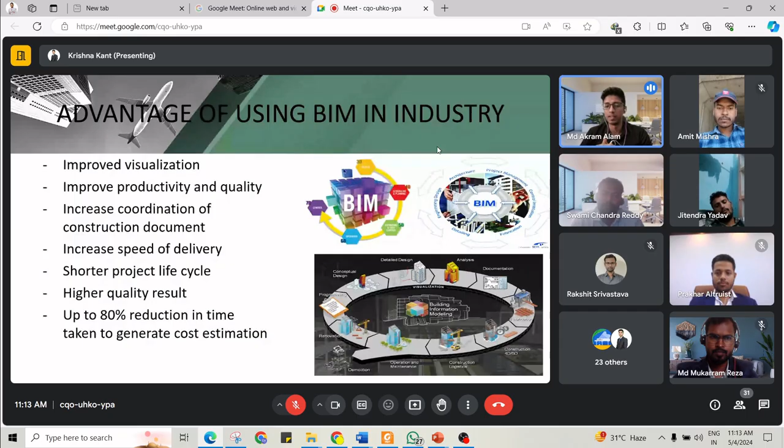With BIM we also get higher quality results - up to 80% reduction in time taken to generate cost estimation. We can save so many things. Right now the government has approved that there are some projects where we have to implement BIM. Even in the UAE, they recently launched norms where if you have land up to a certain area, you have to implement BIM. There is a huge scope in BIM now.

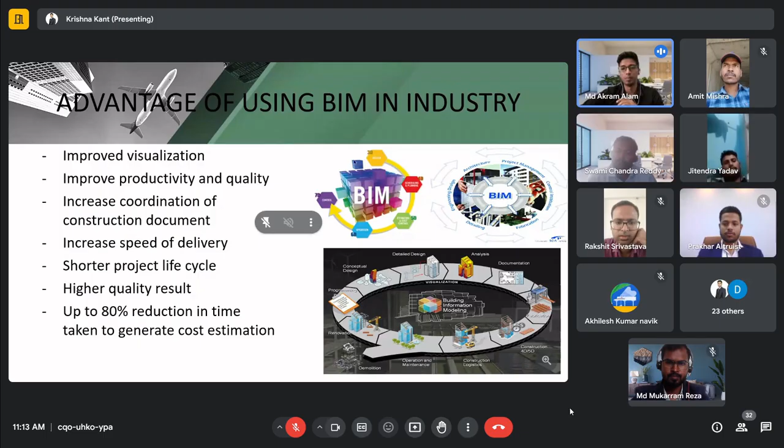Now let's see the BIM survey worldwide. Right now BIM is booming in the industry, not only in India but all over the world. You can see the graph where BIM is booming - India, Thailand, UK, Poland, Germany, France, Australia, Indonesia, UAE, Dubai, Saudi. It's all over, and we have so many regions now implementing it.

It's a good opportunity for civil and architectural engineers - they can opt for this. BIM is not only one discipline. If you think, if I learn BIM, where can I go - this question might come, right? There are so many disciplines in BIM - architecture, structures, 4D, 5D, 6D, 7D, and many more. I will show you those in detail.

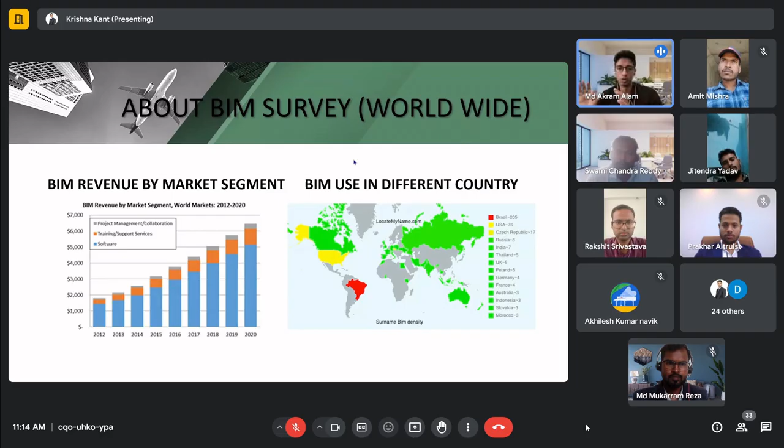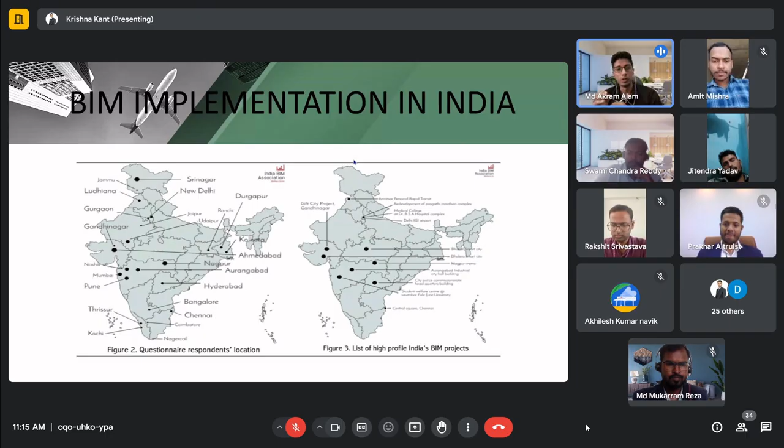Coming back to India, let's see where BIM is being implemented. Before, very few regions used BIM in India, but now you will find it everywhere - Bangalore, Chennai, Hyderabad, Ahmedabad, Kolkata, Pune, Mumbai. Everywhere you will find BIM. And if you see on LinkedIn, how many options are there for BIM opportunities - it's huge, as you can see on the map.

It's not like people who are going to learn BIM have to learn all the software. It's not like that. For each software, a different discipline is there. If people have interest in the architectural firm, they will go for BIM architecture. For them, you need to learn Revit architecture. The person who has more interest in the structural field can go for Revit structure.

Some people have interest in MEP. Some people have interest in estimation, 4D and 5D - they can go for Navisworks. Some people have more interest in the project management thing. In that case, what will you do? Then you can go for Primavera project management. There are so many software - these are the examples that we use in our industry.

Now coming back to the BIM service, as I was telling, if you do BIM, what are the options? What are the career options? Where I can go, where I can choose - in this field I have more interest, I can go there.

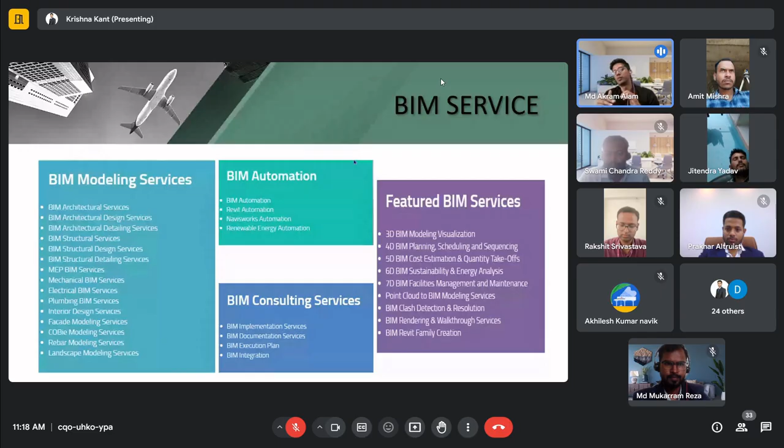With the specs you can go inside and check everything - okay, this is how my building looks. It's surprising - before construction you are seeing your dream house, this is how it looks. So now, in 2024, automation is going to hit, everyone is focusing on AI now. So BIM is not only modeling, it's getting day by day more integrated and all.

So there are some dimensions of BIM also - you can see featured BIM service. We have 3D modeling, 4D, 5D, 6D, 7D. Do you guys know what are the dimensions? You know 2D, you know 3D, but do you have any idea what is 4D, what is 5D, what is 6D, what is 7D? There are 8D also, 9D also - there are so many things.

So 3D is normal 3D, 4D is like planning, scheduling, sequencing, 5D is up to cost estimation and material takeoff, 6D will be energy analysis, 7D is facility management. Now most companies have implemented 8th dimension as well - 8D is like safety and management.

In India, people do till 6 to 7 dimensions. And if you come to international countries like UAE, Saudi, Australia, UK, US, they are using till 12 to 13 dimensions also - they are on that level of implementation. So in India also they should implement, right now they are implementing also. Before it was very less, but when you see now, it's really good.

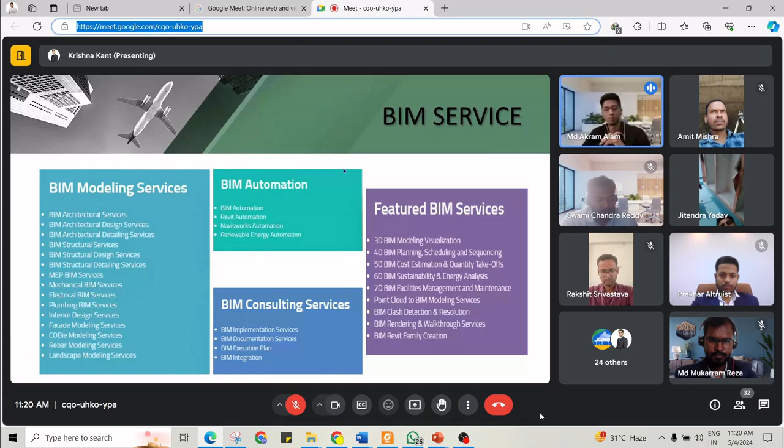Now see these are the dimensions as I told you, like 2D, 3D, 4D, 5D, 6D, 7D. These are detailed design.

Before, when there was no software, what did architects used to do? They used to do pencil sketching and all. They would show the section, they would show the elevation, this is how it looks. But right now it's totally different. It's not like doing the sketch thing anymore. If you make the 3D model, we can give the section drawing, we can give the elevation drawing, we can release the construction drawing with each and everything in detail.

So these are the dimensions where we are expert, like up to 7D we are expert. We have our team, and they are expert till 7D.

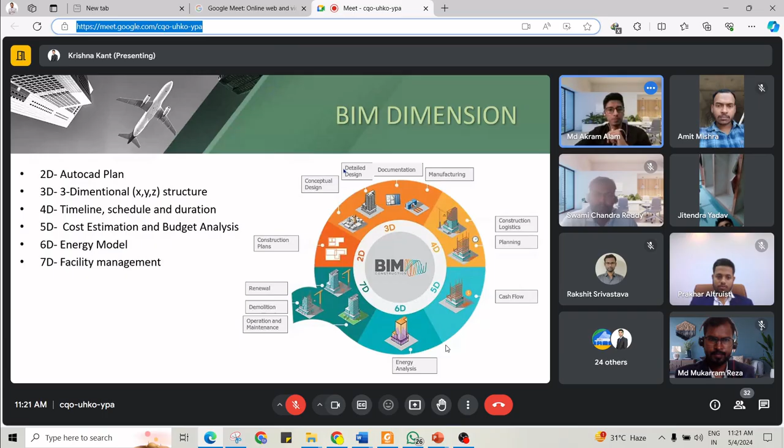Now see there are some LOD in BIM. If you guys know this, we have some codes also. Like for the structural engineer they have different codes, for BIM also there are different codes. So when you go through some code you will get the detailed design. See, there are some LOD levels.

See, LOD is level of detailing. When it comes to LOD 100, it's the starting of the project. When you start the project, what do people do? They will think, okay, in 2D they will make a rough drawing. Here I will keep one room, here I will keep one house, parking. They will just make a rough sketch, right? Just to show, we can call it the bubble diagram. We will just show that okay, this area my 2 BHK flat will be there, here my parking will be there. This small thing comes under LOD 100. It's just planning.

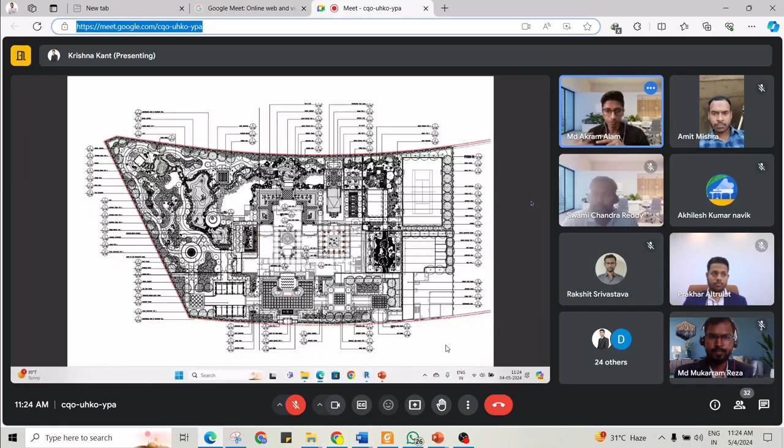Right now it will be looking like, oh, this is too heavy, I can't understand what is this, you know. This is a big project. When you do this kind of detailing, you have to deliver it to the client. Even if you work in a different company, they have their own different standards.

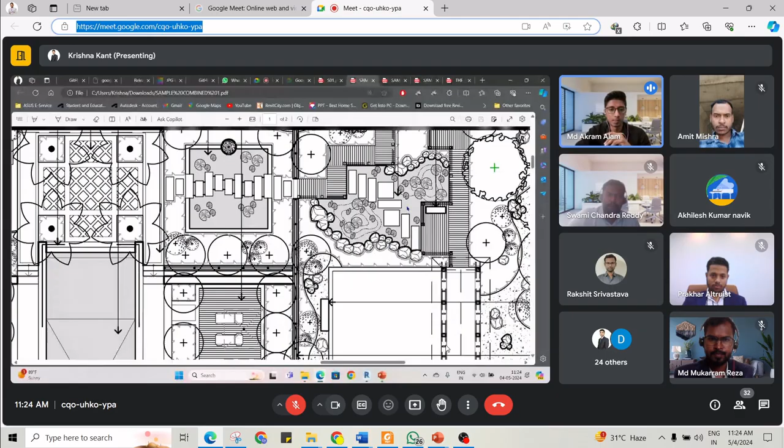Can you zoom somewhere? Now I will show you a small part. See, these are the construction drawings, like how we work. These are the detailing drawings. See all the tags, this is from the landscape. See, you can see parking, you can see trees, you can see pathway, paving, wooden deck. There are some architecture building elements, there are some tags. Can you zoom out?

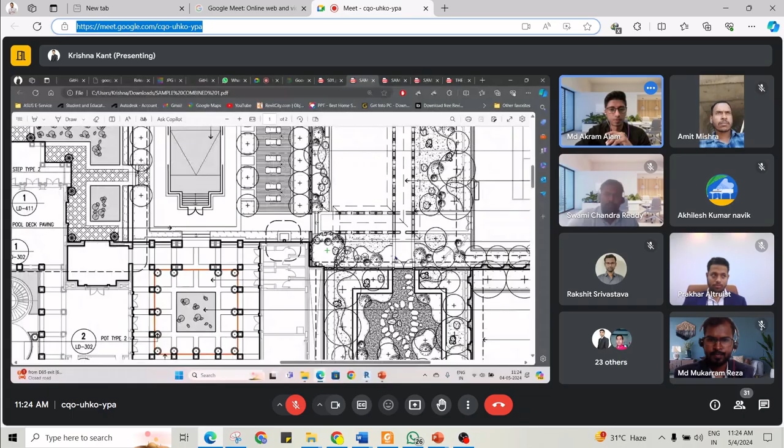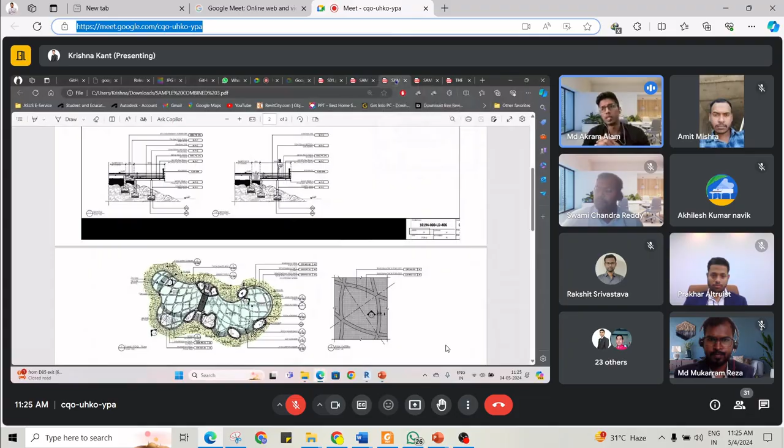See, these are the details, this is how we tag in the software. What is this pergola? 1 LD 405. We have different sheets, construction sheets. When you work, you will go to each and every company, they have their own standard of how they create sheets. These are the samples which I am showing you now, this is how we create the sheets.

See, this is the footing detail. Just hold for some time. Now see, this is also a shade structure, pool.

Now these are the sections. See, this section, it's not like we are drafting in CAD. It's not like that, this is how it looks. We make it in the 3D model, we take a section, and it will come out like this.

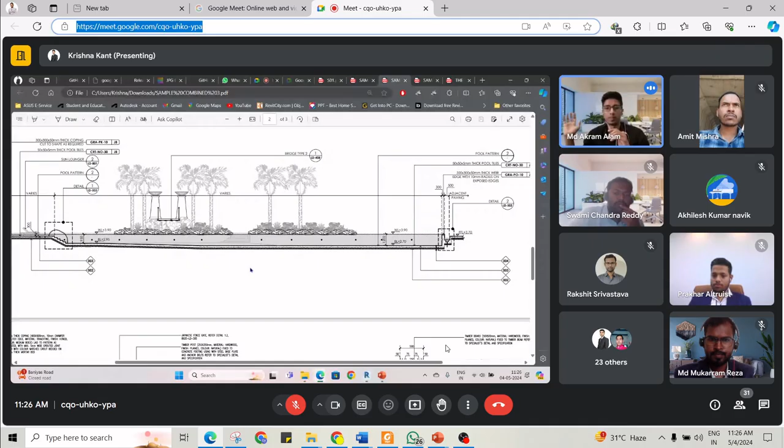We provide live sections, and we start giving the tags and everything, then we send it to the contractor. The contractor will see it, they will comment on the areas you need to change, and then it comes back to us. We change the different things, and then we proceed. Once the contractor agrees, they will start construction. So these are some samples of the sheets.

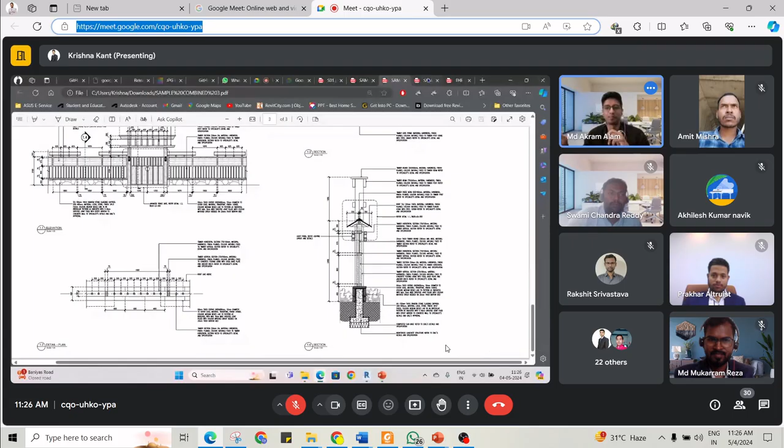Right now you people will be thinking this is too much, it's going out of my head. It's nothing like that. Once you enter into this, it's easy. Initially for 1 month, 2 month, 3 month there will be problems, but I guarantee you, for civil and architecture people, this is the area.

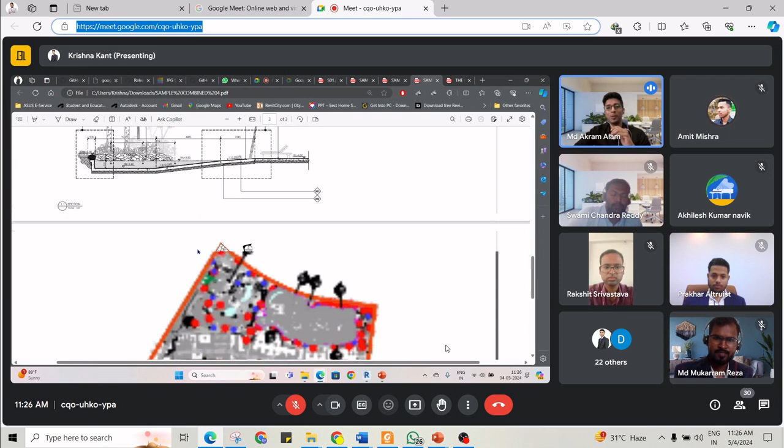As per my thinking, people need to opt for this, they have a very big scope, very big. In the structural industry, you guys can get the job easily, you have the options. I will tell you frankly, I have trained more than 2 to 300 students over the past 3 years.

I am a trainer as well, I train people not only from India but from other countries also. And they have not only one job, two jobs, they have 2 to 3 options. Most of the people, 60%, have 3 to 4 options to join companies. In BIM, you can't imagine how many options are there.

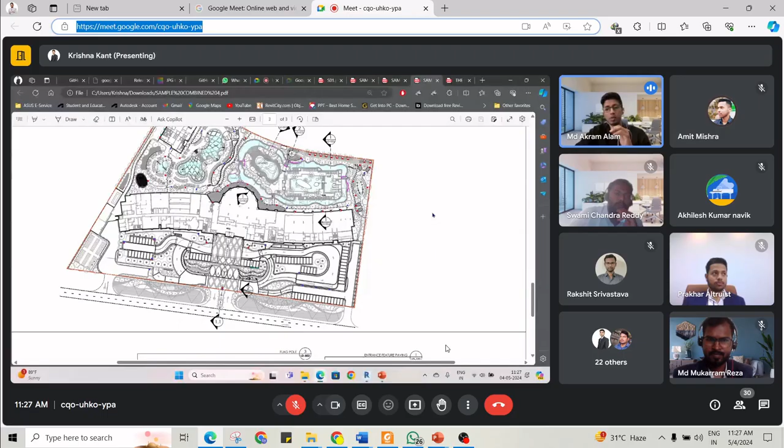You guys can go to LinkedIn and search, because this is the time. I guess third and fourth year students are here. This is the time you have to choose one discipline, and you should be clear on that, you should have interest also. It's not like, okay, this is good, I can join. Joining is fine, but you have to show the interest as well, and do the things properly.

This is a huge scope, because in India, what I can see for engineers, they don't know where to go, right? Some people are going into IT, some people are going elsewhere. Now we are here to tell you the true picture about BIM, about structure, for architecture engineers, for diploma holders, for structural engineers, where we can go. So I hope you understood this.

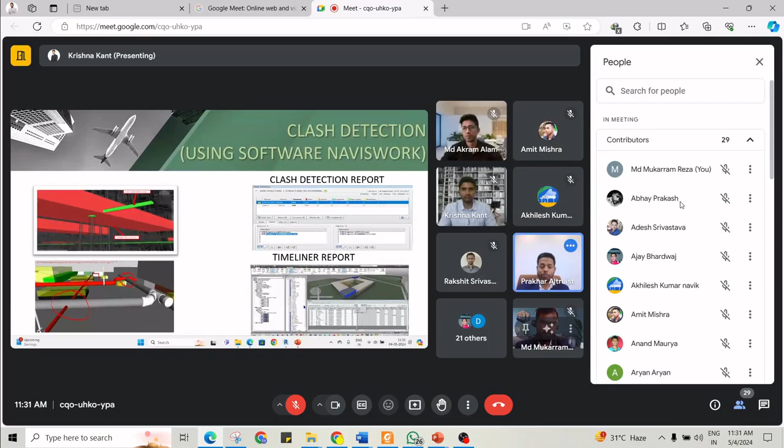So clash, what is clash we are getting in civil? Suppose a pipe or a duct is going through the column or through the beam, so it will definitely impact the valuation of the cost of the building. That is the reason we do this clash detection before implementing the project on site.

So this is the total visualization process. When we are going to implement the project on site, before that we have to do this type of process, and for this we have a lot of documentation process also.

I am the expertise. I was the BIM coordinator of an MNC company, and I did a lot of projects. I created a lot of documentation for this inside BIM with the help of the ISO 19650 codebook and BS 1192. There are a lot of codebooks also, but you don't get this codebook knowledge inside the CAD industry or inside the training industry.

Actually, we are having our own office, we are doing our own projects. That is the reason what we are going to train you is totally based on job training. If you guys get training from us, you will have better knowledge of what is going on in the industry.

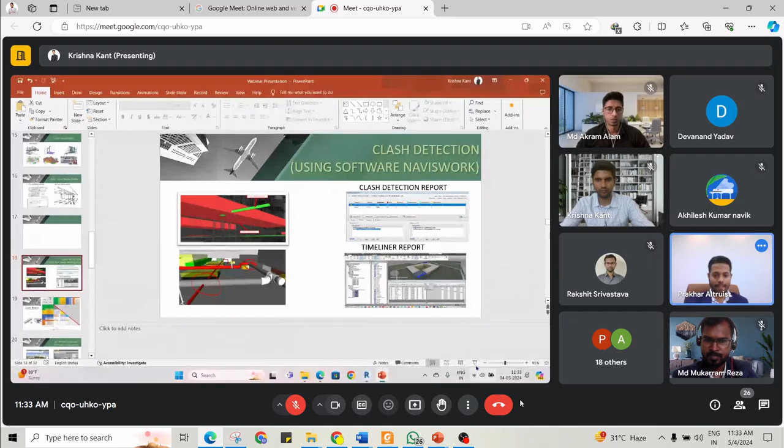One more thing I want to let you know, these are all the processes for the BIM coordinator. Do you know the salary expectation of a BIM coordinator in India only? The minimum salary in India for a BIM coordinator starts from 8 LPA. If you are talking about the UAE where we are seated, over here the salary of a BIM coordinator starts from 24 LPA to 30 LPA. It is the minimum salary that a BIM coordinator is asking.

One more thing I want to let you know, within 3 years I became a BIM coordinator. Then within 5 years I started my own firm in the UAE, and we have already registered our own firm in India, that is Gyrfalcon Design and Build Private Limited, and in UAE, Gyrfalcon Design and Engineering Services LLC.

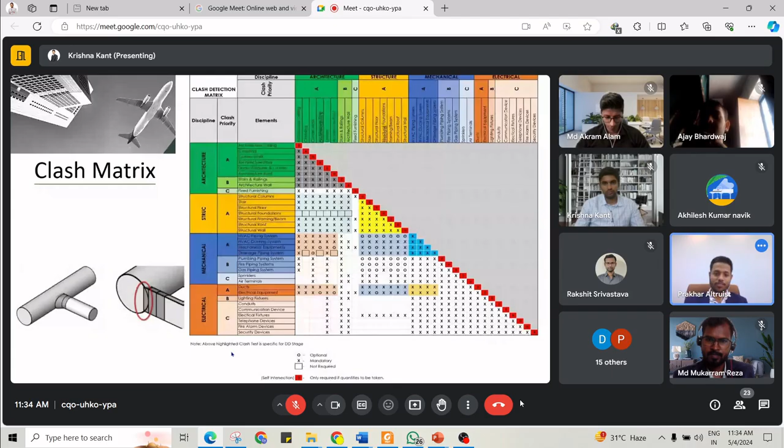Please move on. So you can see here this is the timeline schedule duration. What is this timeline? When we are going to construct any model on site, a lot of huge material, you can see, gets kept anywhere.

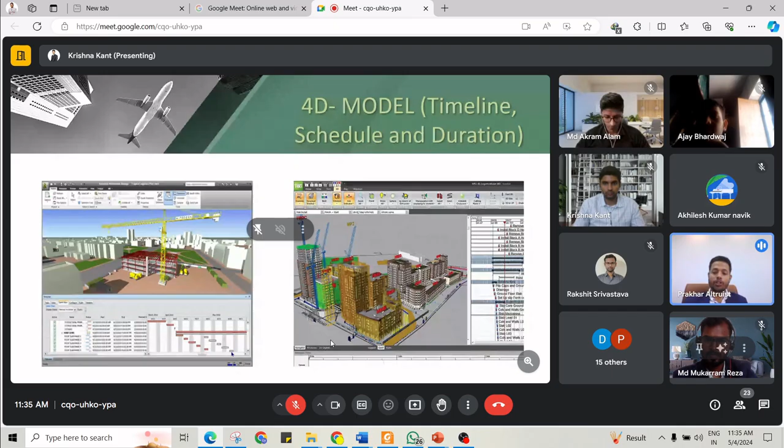Because of that, you lose a lot of material quantity. That is the reason we do this simulation process, so we can get a proper idea of where which material has to be put, so it will not impact other equipment or the flow of the construction.

Do you know how you will save the cost of the building while doing budget analysis? In the previous era, if you were going to do the quantity takeoff, you only had CAD drawings, and with that you had to do the calculation for each and everything. Then you would get only an approximate quantity. But now in the automation industry, in the BIM industry, building information modeling industry, you have the power to make a model and take the quantity takeoff within a minute, and analyze the proper cost of each and every instance. Like this, you can save 80% of the cost of construction on site.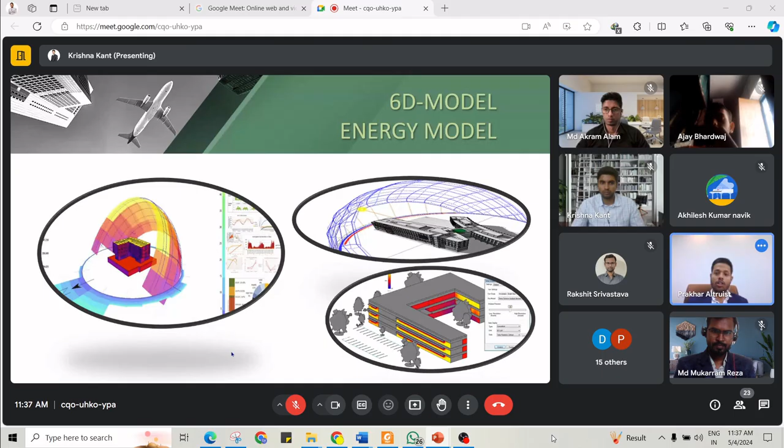We are the person who are going to train you what is energy analysis and what software you are going to use in the energy analysis. We are not just going to teach you these are the tools, you have to create the wall, no, we are properly involved people who do this type of analysis in the industry, and who are saving a lot of money for the builders and the contractors as well.

Now, 7D facility management. What is facility management? This is, suppose you have already created a building, and now you don't know the durability of, suppose, a door. Suppose the door is an oak wood door, I'm taking this just as an example. Its duration is 10 years.

So if you have this facility management involved in your model, and you have the BIM model of your building, automatically it will blink in front of you that you have to change this door within this duration of years, this time duration. Like that, you can save your cost, you can save your money, you can save the builders' and contractors' money, and you also become part of the BIM industry.

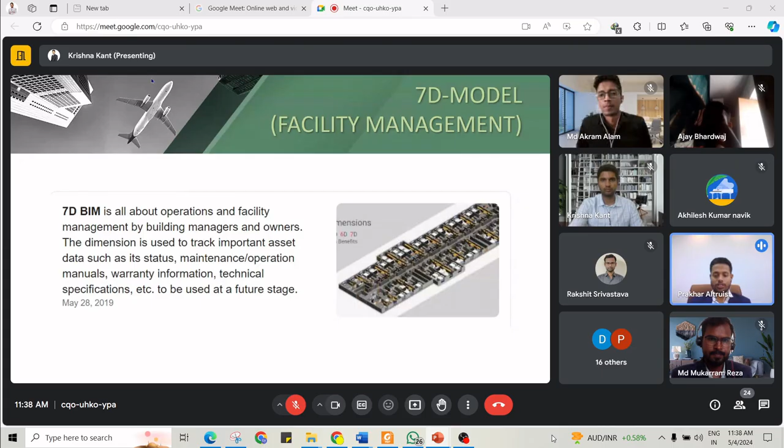And with the help of this, nowadays contractors and builders are doing IRR ratio also. IRR means internal rate of return ratio. So construction companies and builders are investing the money, and they are asking for the returns, how much they are getting. So that is all from my side.

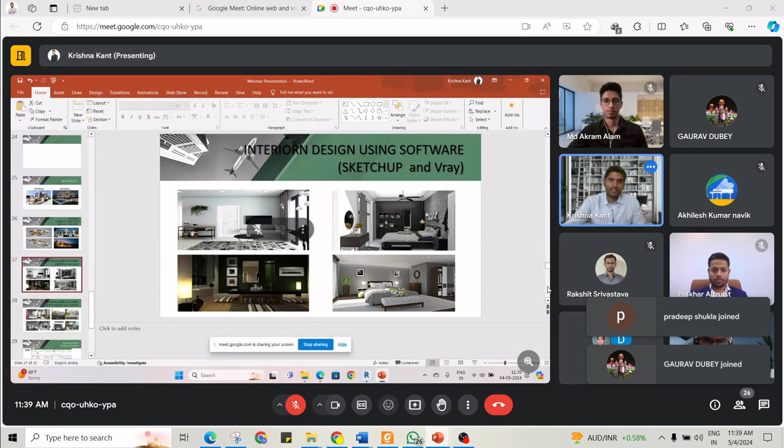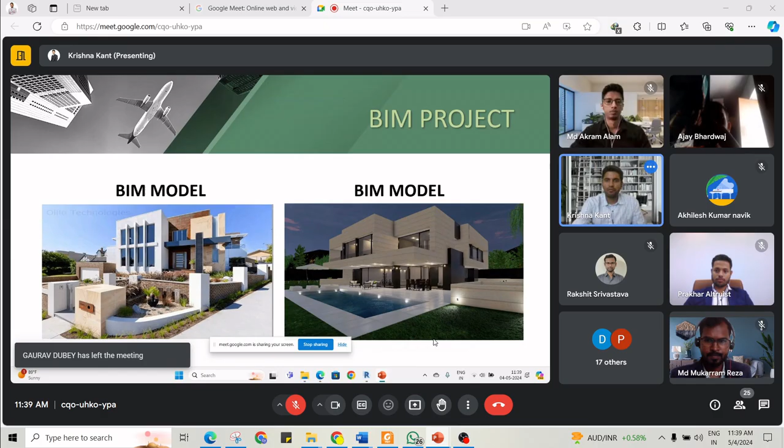So I will show you some projects which we have already done before. These are some projects which have a very good elevation. Even the BIM model we have created for this kind of projects. So you can see the projects have a very good aesthetic view which we have to show to our client. For these kind of projects we are dealing with, we have to create the isometric view, and sometimes show the client their spaces, how we can utilize the spaces quite well.

So for that we have to use different software to present their houses and flats, and sometimes duplexes, so many villas and all. We have to show their aesthetic view also.

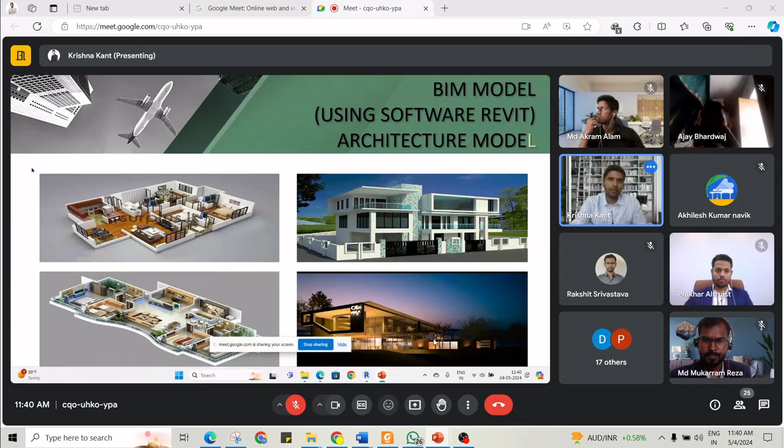These are certain interiors also we have to draw inside our project. So you can see how exactly we can show the bedroom, living room, and sometimes the kitchen and whatever the utility area, washroom and all. We have to show the interior for that.

And the software which we are using for this type of rendering and all, basically it's a combination of software such as SketchUp to V-Ray, SketchUp to Lumion, Revit to Lumion, and there are so many different software as well, like D5 and so many others. So those software we are going to train you, and we will let you know exactly how beautiful render quality it will take out from our model.

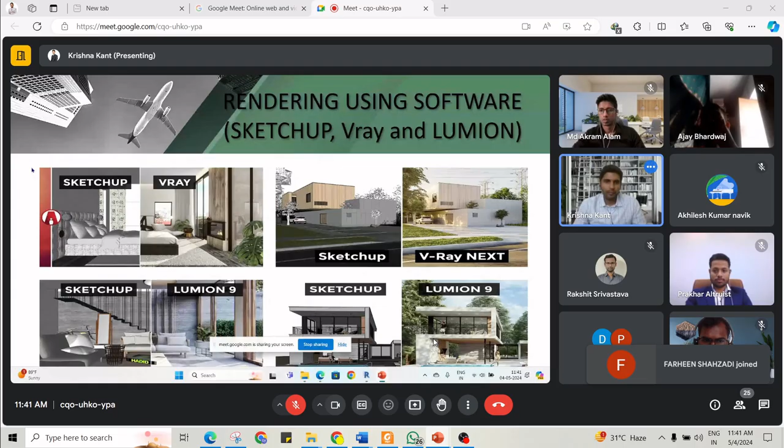Now coming to the project management part, obviously you all are aware of management. Nowadays, without a manager, we can't handle a single small project. Even a food area requires a manager. People are doing MBA and all, and after that also they are searching for jobs. But in this BIM field, we have to do the management for the building, like how exactly we are processing the building, scheduling the exact time duration and all.

So for that there is so many different software, obviously Navisworks and the different Synchro part, which Prakhar has already shown in the 4D and 5D simulation. 4D is basically the timeline, and 5D is the cost model.

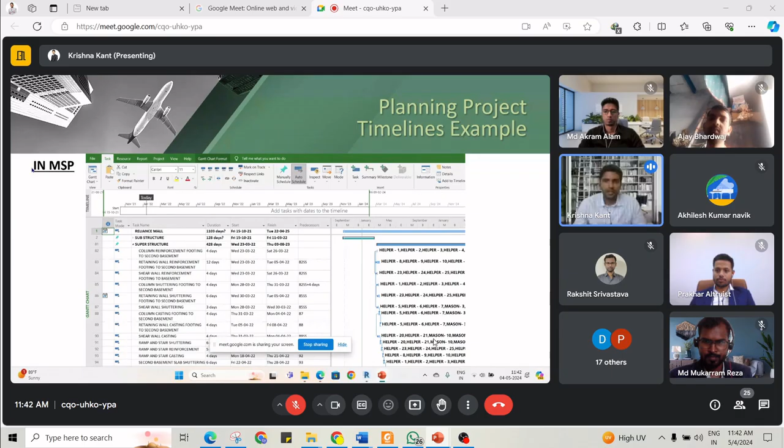Apart from this, there is the software called MSP, Microsoft Project. In this, we have to deal with the timeline and the planning part.

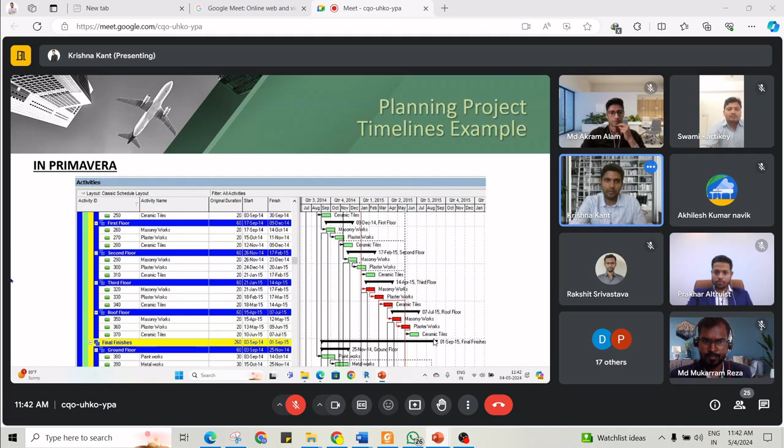There is another software similar to this, Primavera, which is nowadays used all over the world. It's a quite good software which deals with so many different charts and different information inside the project, and it will carry out all the project information at a time. So it's a very good software, Primavera. We can teach you this type of software. It's a very handy software, and nowadays it's used by almost every company.

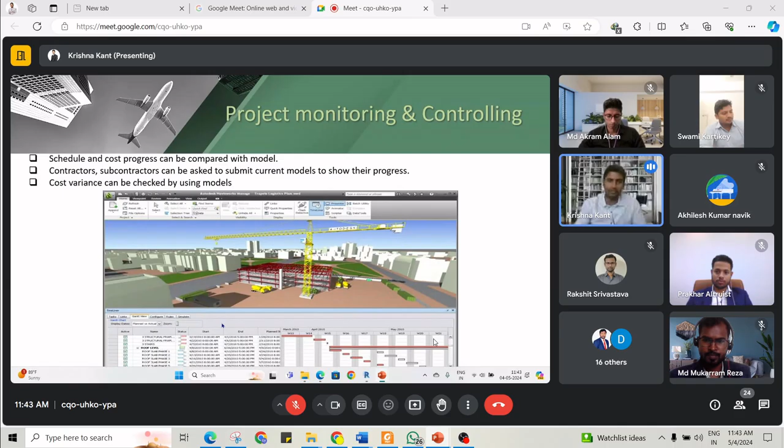So the Synchro part is also there. Synchro is a very good software. From this software we can not only create those kinds of schedules which were already shown in MSP and Primavera, but we can also show the 3D simulation video, which is very effective to visualize the thing, like how exactly the machines and machineries, the levers and all, how exactly we are managing. We can show the levers, like how exactly we are dealing with which type of lever machines, and we have to calculate as well, like what are the costs. From this software we can analyze the cost as well. So basically, these are the project management software.

I will show you certain interior renders and all, so you can think about how exactly we are visualizing our projects.

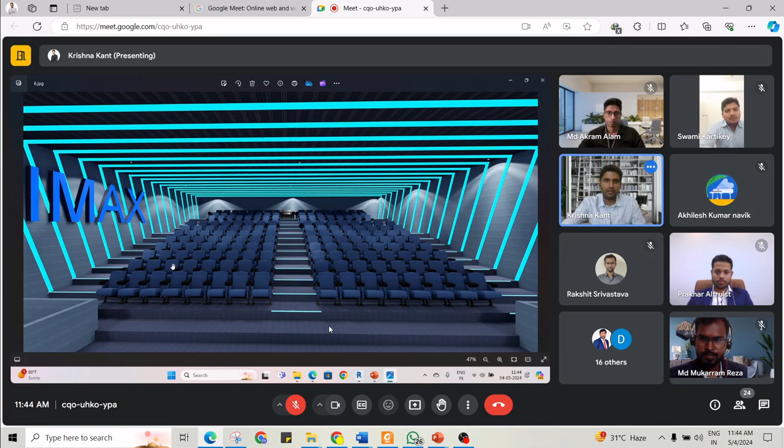You can see this is one of the theater render projects. Inside this one project, we have done work for Reliance Industries. You all know how big their projects are. So these are certain theaters, and you can see the video visualization also. You all went to the theater, right? So you can see how exactly we are presenting the theaters and all to our client. Quite interesting.

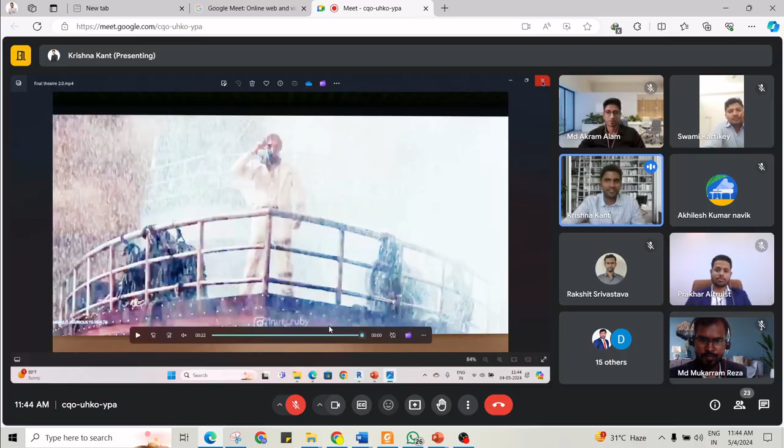I will show you another video. So you can see how we are presenting to our client. Obviously, the client will be so much happy after seeing this kind of animation and all.

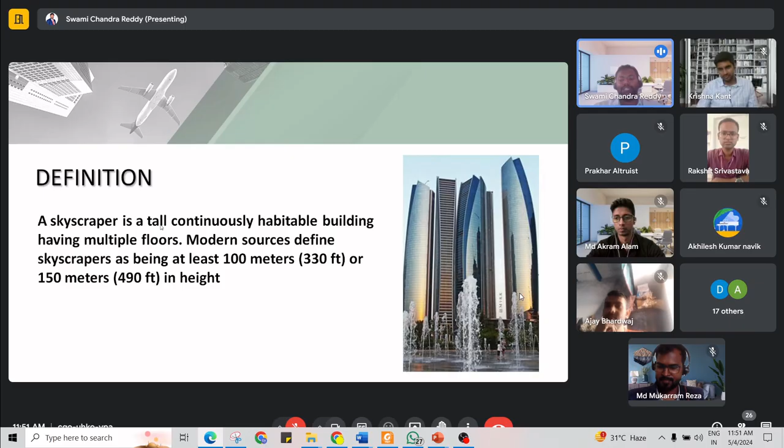I'm asking in terms of, see, there is a parameter called ductility. You might have heard about ductility. You might have seen the Bahubali movie where Prabhas enters Rajkota with a coconut tree, bending it like a rope, and throws it. So in the same scenario, the coconut tree has so much ductility that even when a lot of forces come and hit it, it sustains. It has lots of ductility which resists whatever vibrations there are. Similarly, high-rise buildings also require this ductility parameter, even stability parameters. So all these things we need to take care of while designing.

Okay, let's move to the next part. Why are high-rise buildings in demand in the market? The first thing is because of the space problem. You have some 100 square feet area, so you can construct 10 floors in that building and use it for 10 people instead of one person staying there, similar to that example. And it might be the business plans or economical growth. If there is no high rise, the city will look so dull. So for the growth of cities, technological advancement, aesthetic views, concept of city skylines, and human expressions, an engineer wants to design buildings at this level to get fame or whatever it might be. So these are the general demands for high-rise buildings.

So once you go to the distribution of high-rise buildings, where actually most of the high-rise buildings are located, you can see the UAE countries where you have the top largest buildings like Burj Khalifa, Nakheel Tower, Anara Towers, Dubai Towers, and if you go to Moscow, Russia Tower is there.

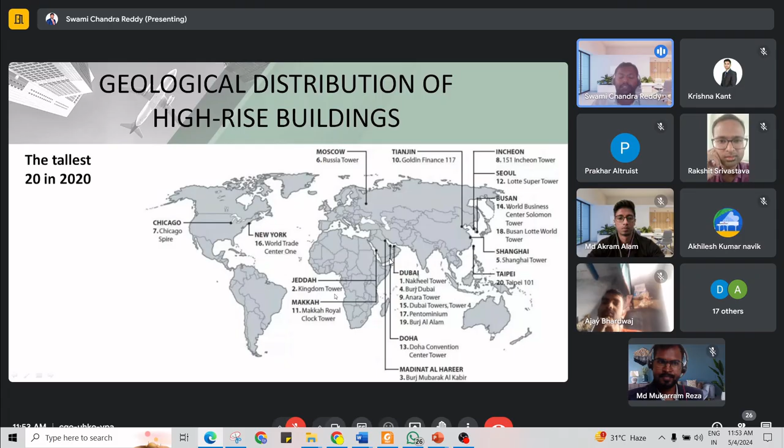Like now currently there is one more tower in Jeddah, this Kingdom Tower, which is going to be a very largest tower. So let's go to that schematic scheme.

So it's very prestigious for our engineers. How to design those things? What is the secret of balancing those buildings for all types of resistant forces? You know what huge forces will be there as dead load? How to construct the foundation for this particular weight? How to resist in this building? Okay, so all these secrets are there in the back end. We will discuss further.

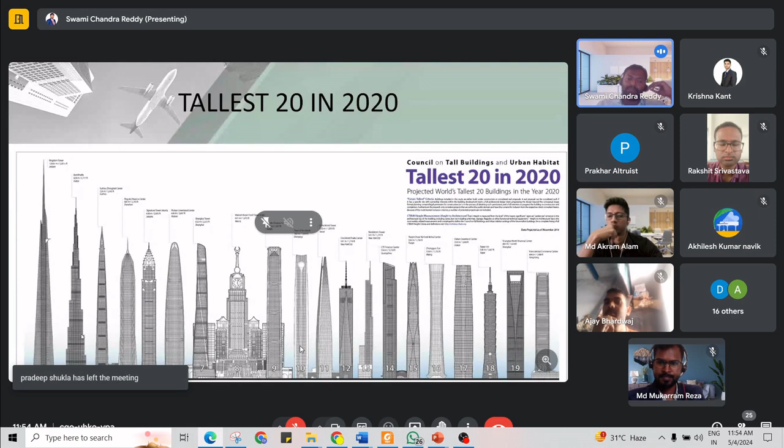So you can see the flow chart, how the buildings all scaled up to the surface in the year 2020, and now whatever is constructed, right now it's Burj Khalifa, and the ongoing project is Kingdom Tower. It's happening right now. But when you evolve the structural systems, let's say you have a 100-floor building, what type of framing structure will you use, what type of construction sequence will you adopt, either RCC or steel, how will you decide, how will you come up with these things.

So here these are the general thumb rules we are discussing. Let's say if it is a 40-story building, generally we can go with a rigid frame system. There is no hard and fast rule to create complexity which will increase the contractor or builder cost. So not required, whichever is feasible we will choose it.

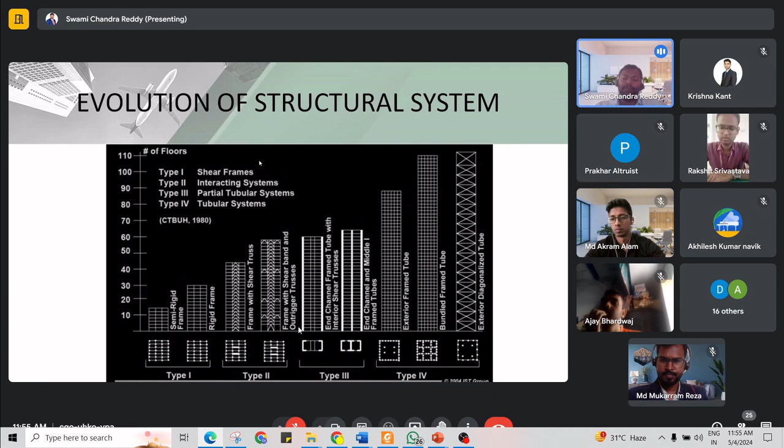So let's say we are going to build a 100-story building, there you will choose exterior frame tubes, like you will choose adaptive columns or positions for the framing structure. If required, you will take bracing systems to resist all the shear forces and bending moments. So this is a general image of how you will adapt the type of framing.

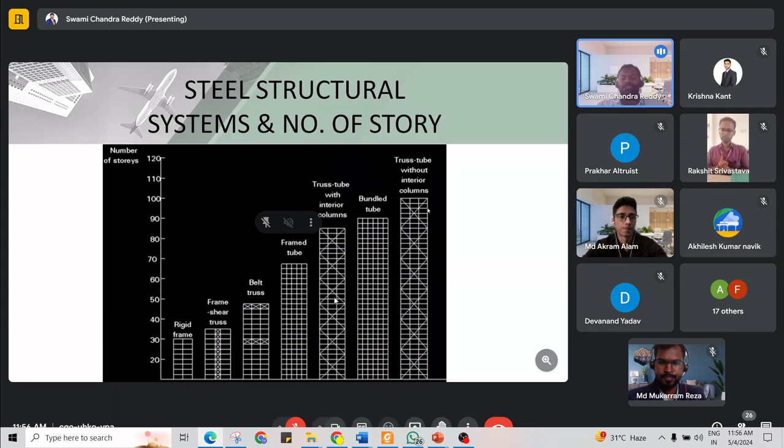So this is the steel structure information on how to adapt such things. Mostly high-rise buildings will not preferably be taken as RCC, like steel, because there are advantages as well as disadvantages for steel. When coming to the advantages, it's a very easy, quick way of construction, but it's a costlier process as well. RCC is much cheaper than steel. But if you still want to build 100 stories, you can go with the bracing systems of steel projects. So this is a general schematic sketch of how you will choose the parameter.

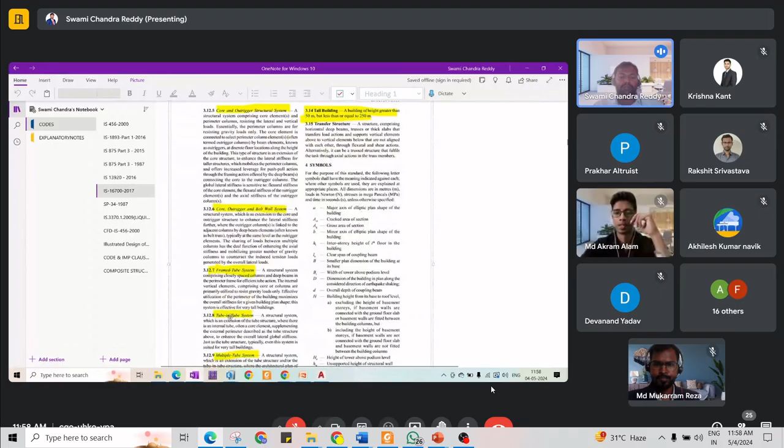So you can see the types of systems over here: multi structural wall system, moment framing systems, flat slab systems, outrigger systems, frame tube system, tube in tube system, multiple tube systems. All this, what we are representing in terms of images, is already generated by the code, which is IS 16700. You should be aware of this code if you are going to design a high-rise building.

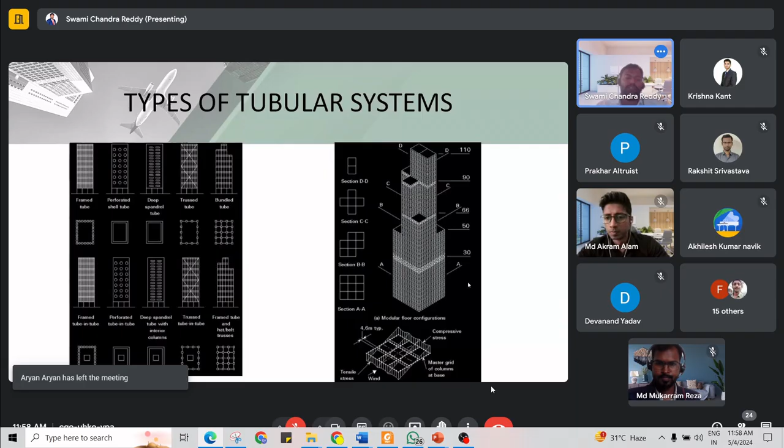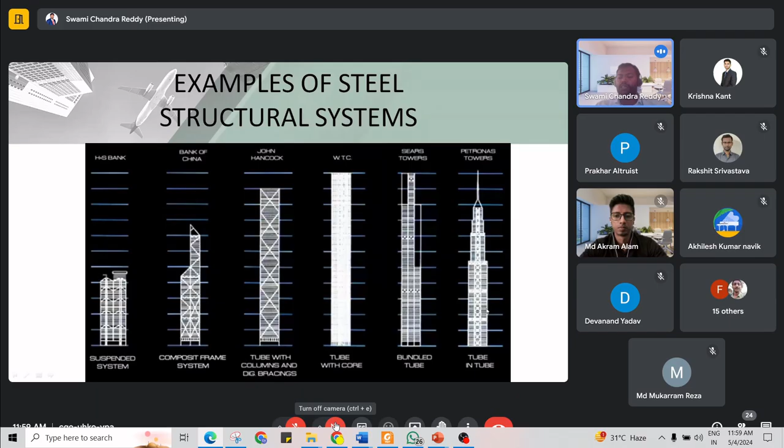Then some examples of steel structures, how the bracings are taken care of. You can see this building completely going with a central core, with the periphery as columns, and in between as bracing elements as deep spandrels.

Okay, next let's go to the shear resisting system. Let's say it's a 2D frame where in college we'll solve through Kani's method or moment distribution method to solve all these forces. But when it comes to reality, there is no 2D. So be aware while you learn the concept, and apply the concept into converting your designs. Whatever we learn in our B.Tech days is going to be only for the basic purpose.

But if you want to enter the market or society, you require practical experience using software, because you can solve up to a maximum 3 by 3 or 4 by 4 matrix by hand. But if you want to design such a big building, the software itself takes 1 hour to analyze the structure, which means thousands of matrices will be developed inside the software to do the calculations. The report generated by ETABS will be thousands of pages, which a man cannot do by hand calculation.

If it is a G+1 building with a gravity system, anyone can solve it sitting for 1 or 2 days and close it out. But when it comes to high rise buildings, even professors or whoever it is, I'm generally specifying, no one can solve a high rise building through manual calculations and state that this building is earthquake resistant proof without software help.

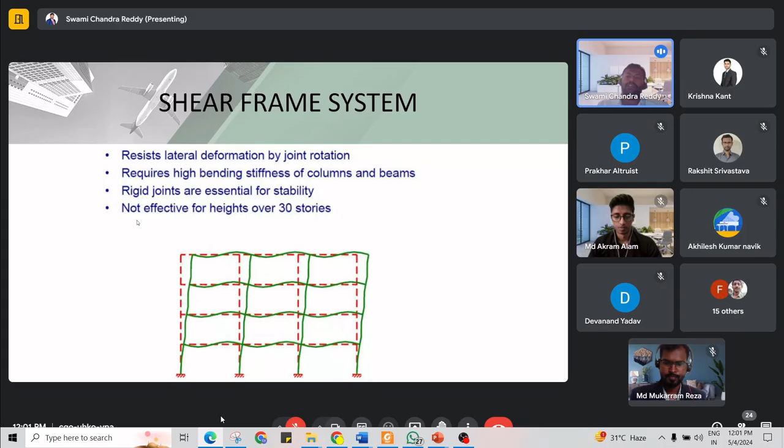Let's say some unknown guy sits in front of the software and clicks something, then knowingly or unknowingly the force distribution or load path is going to be changed, which is not exactly right compared to how the manual thing happens. So we should be aware of how the loads are happening or transferring in the building design, as well as checking with the software design. I prefer both cases.

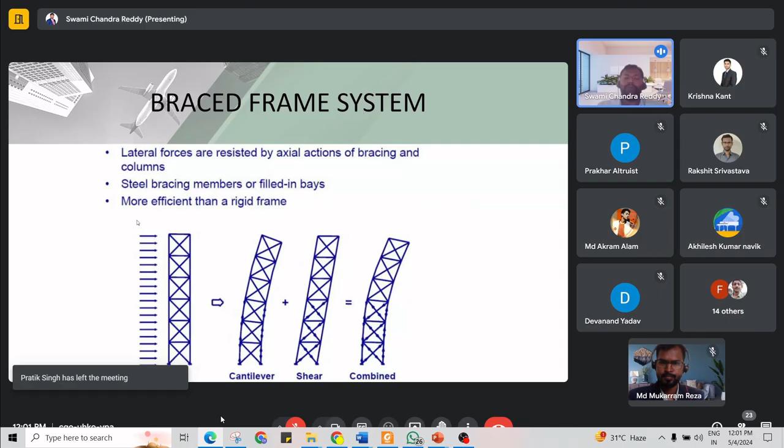So the bracing type of systems, how it affects lateral forces, bending, compression, tension actions and shear deformations - all those things are very critical to understand at this stage. If I critically explain this to a student, once you work on some projects you will realize all these things, and this will be a commonly used parameter when coming to the industry.

Okay, so this is the outrigger system. There are multiple projects constructed where, without an outrigger, there is no possible way to control the wind forces. So the possible or efficient position to place the outrigger is at a distance of h by 2, where h is the height of the total building, or you can put it from the top at h by 3 distance. What is an outrigger? Is anyone generally aware of outriggers? Let me ask you a question.

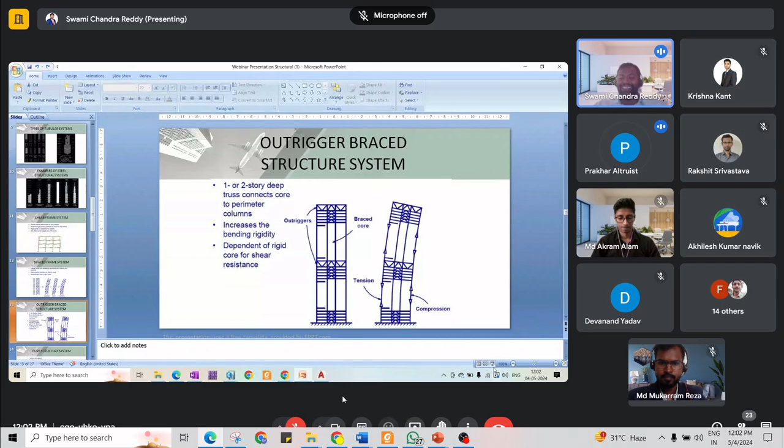Generally, outrigger system stands for a deep beam connecting your core walls to outer belt walls, which will be completely participated during the lateral force activity. It will be completely taken by the shears. So outriggers is a very critical item when coming to the execution as well as the design parameters for high-rise buildings. So we'll see further how to design those things.

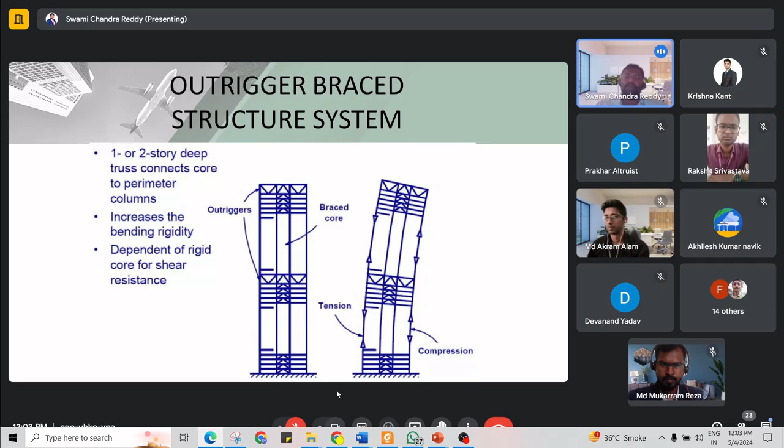There will be composite outriggers, RCC outrigger, steel framing, bracing, like all those things. There are multiple types in that. So just giving a word how this is going to apply in the high-rise buildings.

There are multiple ways of designing a building, but we need to see the cost efficiency, how a contractor or builder can afford it, and how much aesthetic view is required. If there is a G plus 40 building, and if you want to place columns everywhere, then it's very easy to place a building. But if you want a column free building where there's only a central core...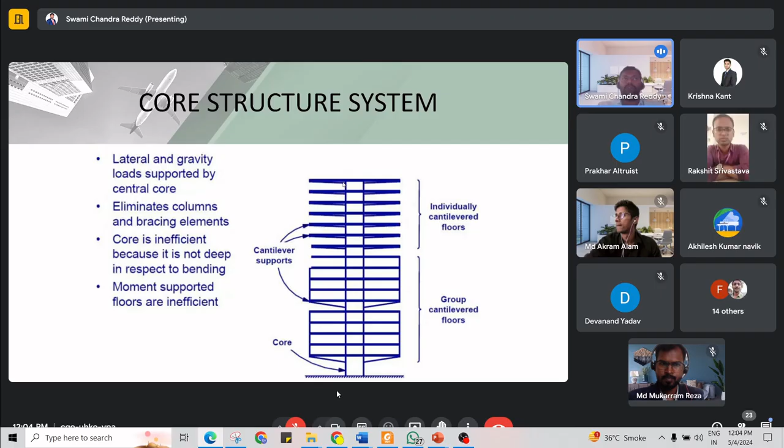Then we need to adopt such type of designs where you can add steel truss systems or cantilever beams for supporting the central floor by connecting to the central core.

So this is the steel bracing system, which is more efficient. You can see mostly steel projects will be infrastructure projects or bridges, like all these things. But when coming to high-rise buildings, it's very rare to see high rise for steel. There are such buildings, I will not say it's not there, but steel is also there with high rise buildings where quick installation is required.

But when thinking from efficiency or money type, we have RCC as a primary role, because of the damping coefficient ratio for RCC. What is damping? It's like the amount of energy absorption. For RCC members, for concrete, there is a 5% defined from the code as a damping coefficient, where vibrations will be absorbed by the concrete when some lateral distribution happens.

But when coming to steel, we don't have such a huge impact of damping. When some vibration happens on a floor, we can easily feel the vibrations when coming to steel members. So the damping coefficient - there's one more factor I think, the thermal conductivity.

So one more factor is that steel has thermal conductivity - that's the heat resistivity.

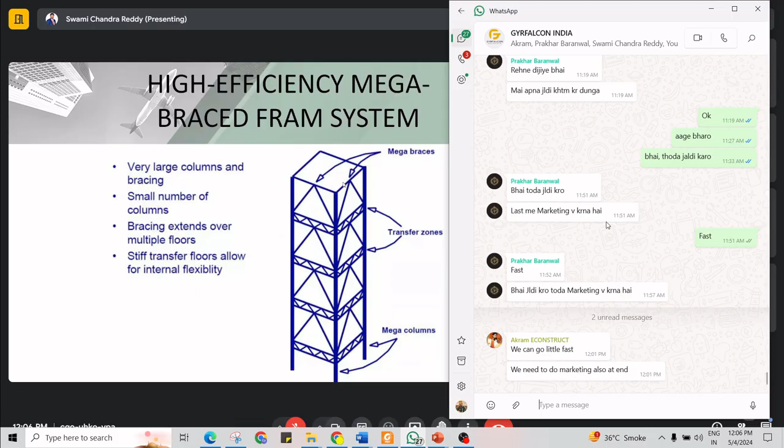Let's say a building is caught by fire, so you should have some locations where a person can stand in the building. We generally call it a refuge area, where there will be 3 to 4 hours fire rating - even if fire catches the building, the walls or members in that surrounding location will be resisted for at least 3-4 hours fire rating. Then there is a chance of escaping for the people.

And also for this fire, since you mentioned thermal concept, I was just repeating this. So when there is a building without taking care of fire refuge or fire lobbies, okay, no building will be there.

At least every 20 floors we should have one refuge floor with separate fire lobbies as well as separate fire staircases. So when fire catches, people can easily escape through that path. That's how the design considerations will be taken.

There are multiple number of branches which take all types of things into account. Now I'm just speaking about the structures part. When you come to the combined BIM model, there will be a lot of things - structures will be one part, architecture is one part, landscape will be one part, then PHE, MEP things, electrical, plumbing, fire rating, ID interior design, exterior design - all those departments will come.

The complete model is called the BIM model, where all the information is captured with zero errors—nothing is left out about the building. All the things required for the execution of the building, from start to finish, are finally captured into the BIM model. That's how generally people work with clash detections.

If we are working as a separate department, like structures, other departments also exist, such as landscape. So we are constructing our column in this location, but their plants or some other element is coming into the column location, or plumbing pipes are passing through the structural elements. All these clashes are found in the clash detections in the BIM model. So this is a general description.

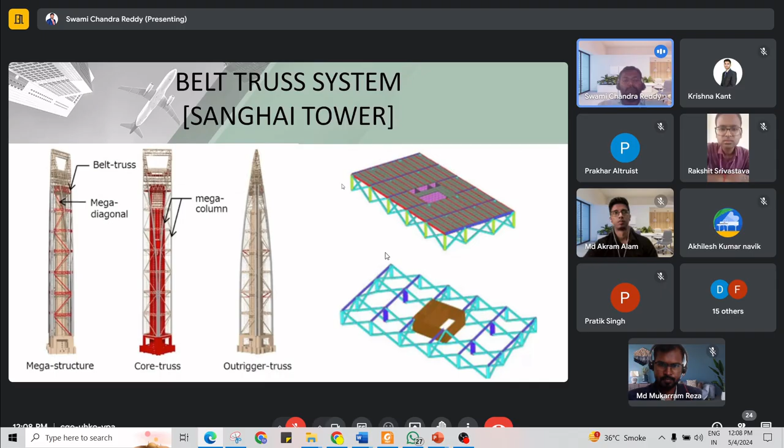Let's move on. I already mentioned belt trussing for one project, the Shanghai Tower—this is the methodology utilized for the trussing system. There are multiple approaches; if you go to websites you'll find a lot of information. But critically, what type of loads are going to attack a building? Simply speaking, there are gravity loads, defined as dead loads, which is the self weight of the building. Superimposed loads, like brick loading or other stuff. And then live loading, which is people load, furniture loads, or machinery loads.

If a building is located in a snowy area, like in the north portion, we should consider the top roof with snow loads as extra loading as per the code—IS 875 is the code for wind and other load calculations.

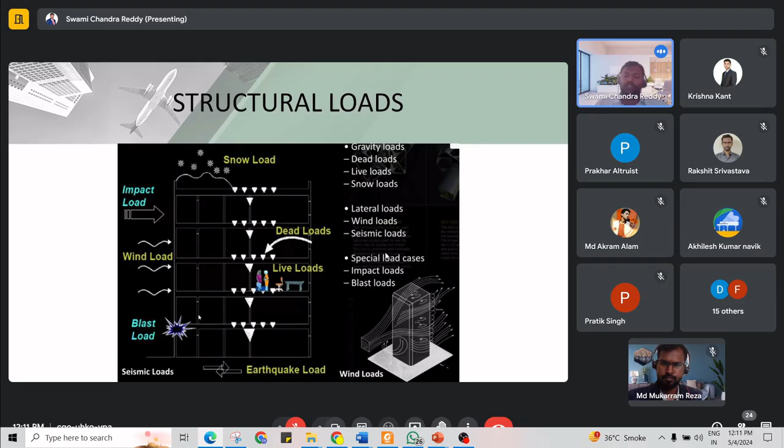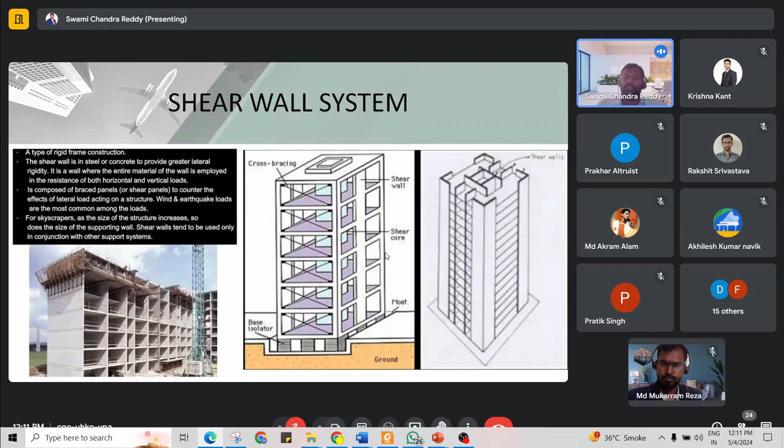So this is the schematic posture of how structural loads happen. Then coming to shear wall systems or mono-wall systems and their connectivities—we've already gone through these things. How the framing systems work, say for this type of building, it's called a tubular system or framed tube system, where a central core is there and in the periphery there will be columns.

We have adopted the same concept in my current ongoing project—the project is Al Maryah Island CP10 and CP11, located in Al Maryah Island in Abu Dhabi. We are going with the same approach: it's a G plus 40 with 5 basements.

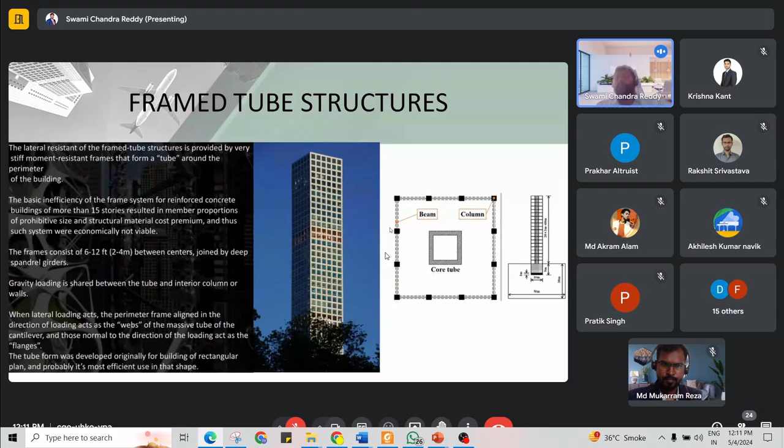Next, going to the tall rise truss system, which can be steel, RCC, or a mix of steel and composite. When required, we can adopt these trusses, or the building constructed can also be designed for base isolation if needed. Then we can go with bracings to resist earthquake forces—such examples are there. These are the general considerations for how tubular systems work as bundled tubes.

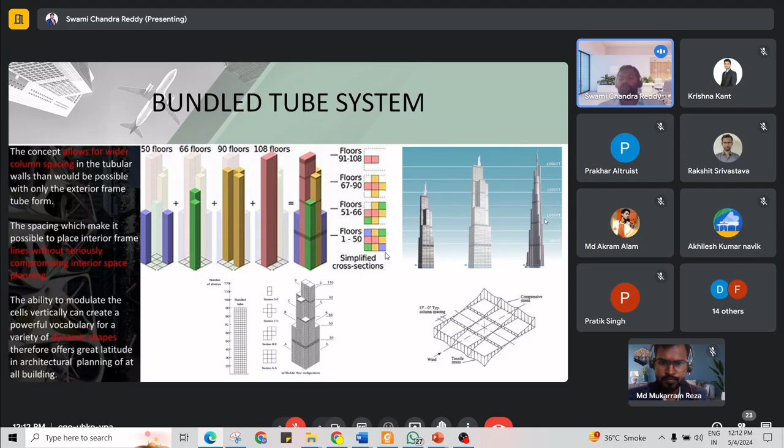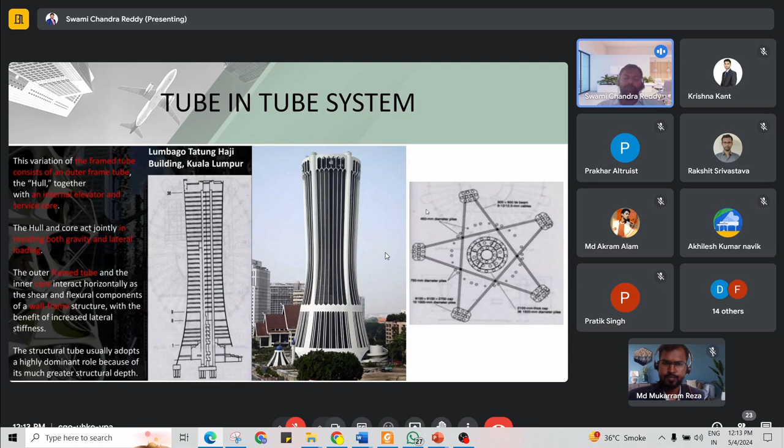This was the system utilized for the design of Burj Khalifa, which is a bundle tube system where certain phases of the building will be stopped and it will be moving forward. You can see here there is a stop in the building phase, and then some other core will be going further. That's how the bundle system works here. This is called the tube system. You can go through this within the code, it has clearly mentioned it, so we should be habituated to reading the code as a structural engineer.

Construction materials.

So to resist all those things, we need to check the soil capacities as well to get adopted. There are multiple types of foundation systems. For simple buildings like low-rise buildings, we generally adopt isolated systems. But coming to high-rise buildings, it should be at least a raft foundation, pile foundation, or combined pile plus raft foundation. So how to design these piles for tension capacity, compression capacity, pile cap design - all those things need to be carried out during the design phases for any type of building.

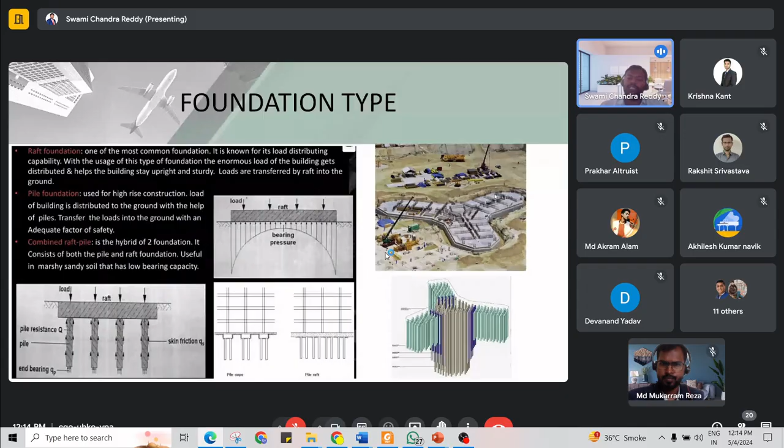For the next process, let's say how the structural design works, or what checks or phases are there in the structural design. First, there will be something developed from the architect, and we need to go through the parameters - how he has approached his design and how we need to satisfy in terms of the structure. We should take care in terms of the aesthetic views as well as the building stability.

You should be aware of reading the architectural drawings and how to work it out in the software. There are multiple number of softwares to design for buildings. Let's say the famous software for high-rise buildings is the CSI family department, which is ETABS software, used by most companies for the design of high-rise buildings.

But there are parallel softwares also. I'm not publishing or promoting ETABS, but this is very user friendly for anyone, and in most MNC companies or most people are utilizing it. There's also STAAD Pro, SAP 2000, and coming to infrastructure projects, there's Tekla Structures, Robot, RISA, RAM Concept, RAM Connection.

So there are multiple softwares, but you should be aware of at least one software before entering the market. Without that, you might be having a 9.5 or 9.8 CGPA, but without software guidance, no company will hire you, because they need to invest on you for the training of the software. Whatever basics you know, finally you are going to design any building from the software only.

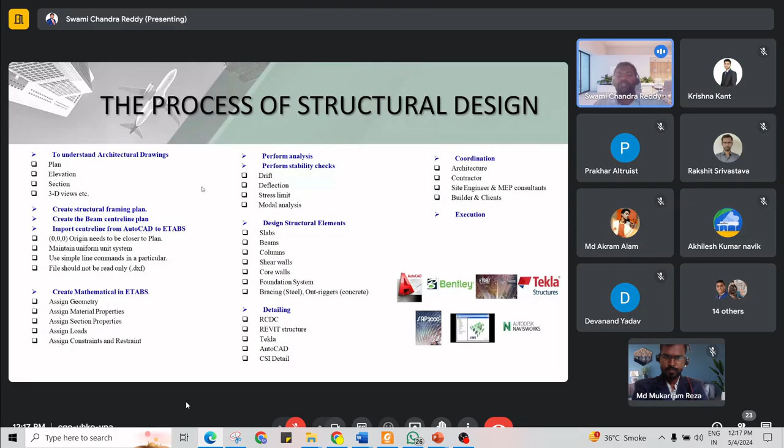Then there will be tender documents, where the contractor or builder is going to release for tenders for those drawings. Then contractors will come with different approaches with their tender documents, and the tender will be finalized. Then there will be issue for construction, IFC we call it as actually.

Multinational companies work with high-rise buildings as well as infrastructure buildings. I'm currently working with a Middle East project, and here Reza is with us, who is a structural design manager, working with the UK team on infrastructure projects. We have executed and designed a lot of projects, and also have experience in the training sector as well.

We trained more than 200 people in our experience.